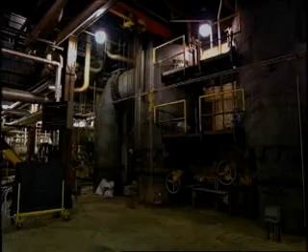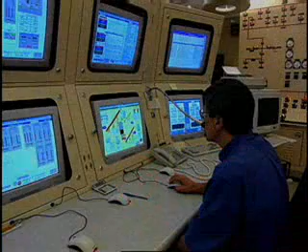Wisconsin Public Service Corporation is an industry leader in providing clean, low-cost electricity to over 440,000 customers in Wisconsin and northern Michigan. And now, GS Systems and Wonderware software from Invensys are a part of the current technology that sparked a revolution at WPS, generating a buzz throughout the entire power industry.

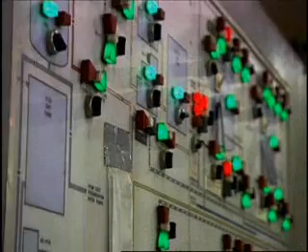About 2/3 of WPS's generation capacity is provided by coal-fired plants like the 3 facilities at the Weston Complex located south of Wausau. Until the mid-1990s, these plants relied on a pneumatic control system to regulate power generation. When it became time to upgrade to PLCs, they needed a distributed control system, or DCS, that would facilitate power regulation. The problem with existing DCS was that they were proprietary and expensive.

In the past, the problem with PLCs had been twofold: not very well integrated with the HMIs, and the programming language wasn't there to do this type of control. So we went into this looking for some software that could program in a graphical type manner. Additionally, we wanted an HMI that was easy to use and that would integrate with that product very easily, and also integrate with other products out there, primarily in the Microsoft type world.

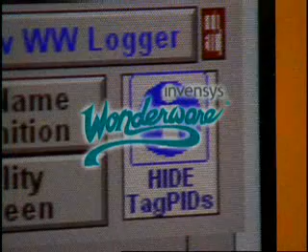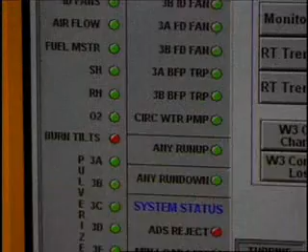GS Systems solved this problem by implementing Control Plus, a hybrid PLC control system, and integrating it with Wonderware's factory suite of products. WPS has been great to work with. We credit both management and Team Weston for the success that occurred here. Management mostly for the fact that they supported the selection of a hybrid solution that replaced DCS functionality or capability, and to the team at Weston for the very effective development and deployment of the Wonderware software.

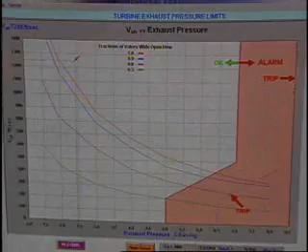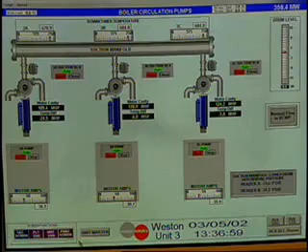This gave the Weston team all the functionality of a regular DCS at a substantial saving, and gave them the open architecture they needed for continuous expansion and improvement. Wonderware has made a difference in our connectivity with our different systems. We have different PLC systems there. We have Modicon for our main controls, Square D for some of our auxiliary controls out in the field, and we're able to go through some interfaces, grab the data and the register points there, and bring those back through Wonderware.

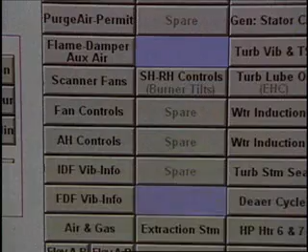They first introduced PCs running Wonderware's InTouch HMI software as operator interface to the PLCs. Then GS Systems installed Control Plus distributed control software to emulate a traditional DCS. They then incorporated Wonderware's Industrial SQL Server Relational Database as the system historian and added Active Factory Data Trending and Analysis package to fine-tune operations.

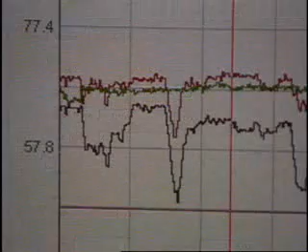This is a program that allows us to go in there and grab any point that we want that's in the database, put it on a trend screen. We can change the scaling, the time base, and look at the data. We can do this remotely. It's not just back in the engineering station or at the operator station. Things are working very nice. In fact, we're going to take what we learned at Weston 3 with the Active Factory, and we bought the license, and we're going to incorporate it at our old plant as well, 1 and 2.

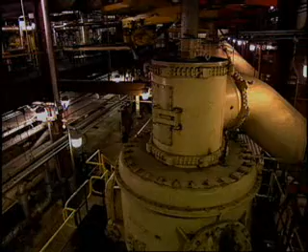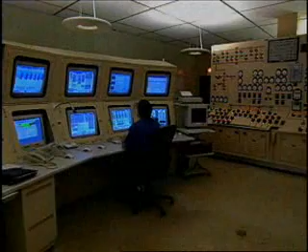The entire control system was updated during the annual 6-week shutdown for turbine boiler overhaul. All processes, from the coal handling and pulverization to the steam generation and cooling, are under 100% automatic control. Now, WPS staff can monitor in real time and intervene anytime they need. The historian maintains records on every step of the process, so there's an audit trail on everything in the control system.

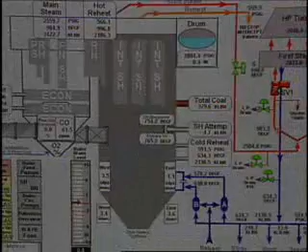The trending software allows both operators and management to quickly and easily view and analyze data and spot potential problems. We can actually somewhat predict what's going to occur with particular systems. Say a boiler leak, we may end up seeing more water usage, and it'll help us look in specific areas to find where that leak may be coming from.

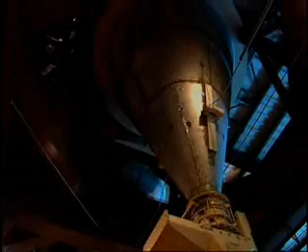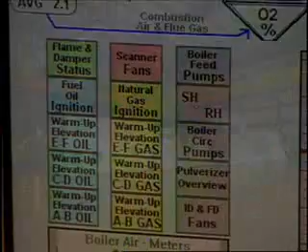The new WPS process control system can help match power generation to user demand. If demand increases, they can respond in kind, and when demand decreases, they can ramp down. Now the Weston Complex is running more efficiently and more cleanly. Wonderware helps WPS monitor and maintain environmental control systems as well. WPS was compliant with the Federal Clean Air Act long before it became law.

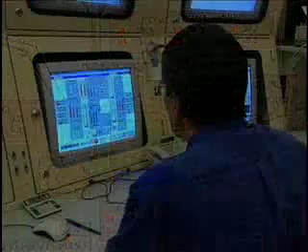When WPS started automating, they were told you simply can't run a power plant with personal computers and PLCs. When we started Weston 1 and 2, we were told by everybody that this was impossible, couldn't be done with PLCs and HMIs like this. We could not control a power plant. So basically we did the impossible. Beyond that, it changed the industry. They've now gone to systems that are very, very similar to this.

Now with the Weston complex running more smoothly and efficiently, how does that affect their consumers? The cost of electricity in Wisconsin is among the lowest in the nation. WPS and Wonderware, bringing power to the people.

Oh, and by the way, if you're ever in Wisconsin, we'll leave a light on for you.